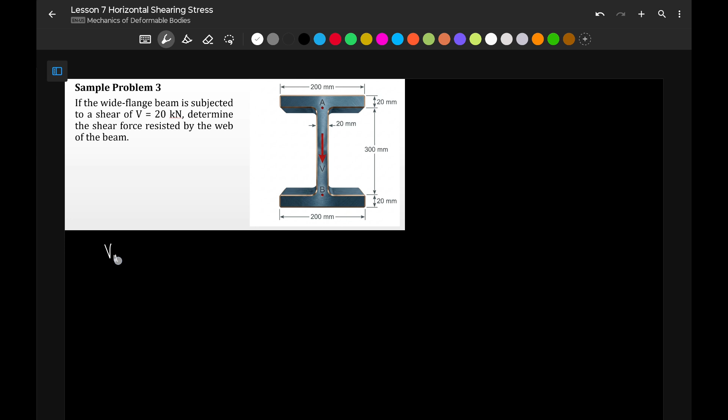Actually, medyo komplikado to no? Symmetrical yung figure natin, yung neutral axis natin ay nasa gitna kasi symmetrical siya. So dito yung ating neutral axis, this is our NA. Ngayon, yung crack mangyayari dito, so ang mangyayari dyan is kukunin natin yung maximum, no?

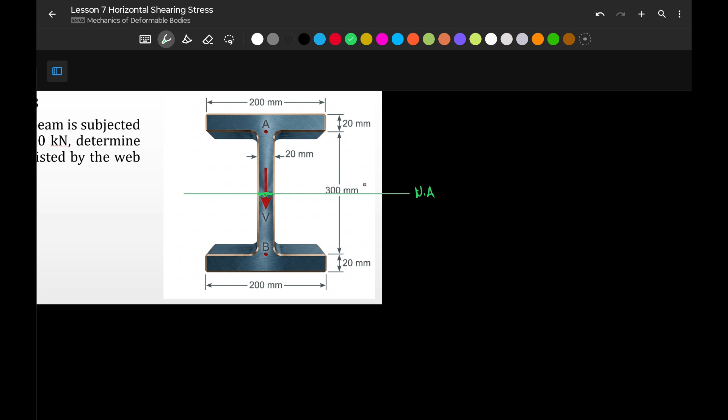Pero ang question sa atin kasi ng problem is resisted by the web. Ang tinatanong dito is yung amount of force na kine-carry ng section na to, this section. Hindi yung buong width or hindi maximum.

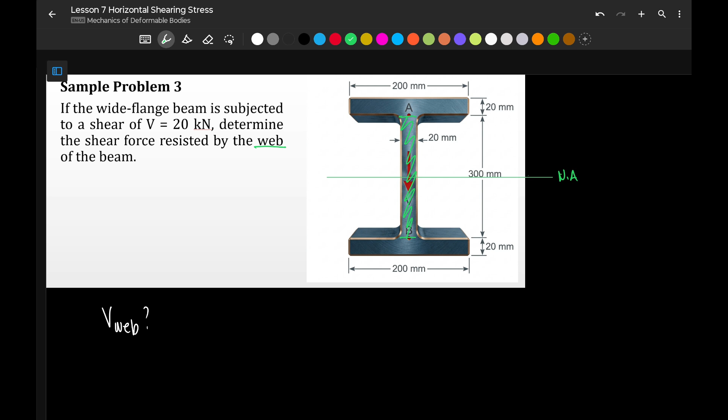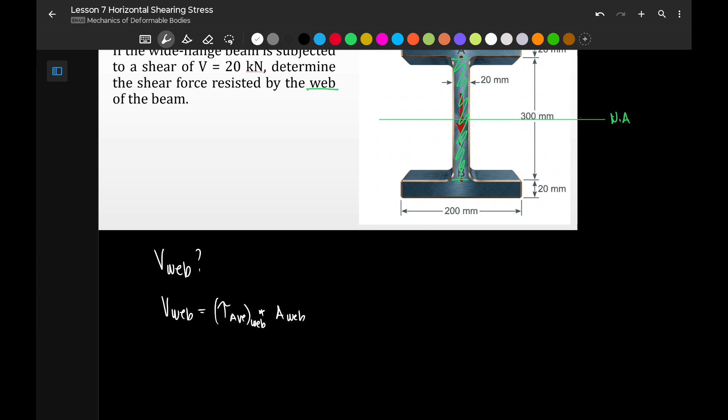Para makuha natin yan, yung shear force resisted by the web, that is equivalent to the average shear stress ng web multiplied by the area ng web. Again, this is the average shear stress ng web multiplied by the area ng web. Ang goal natin, hanapin yung average shear stress ng web.

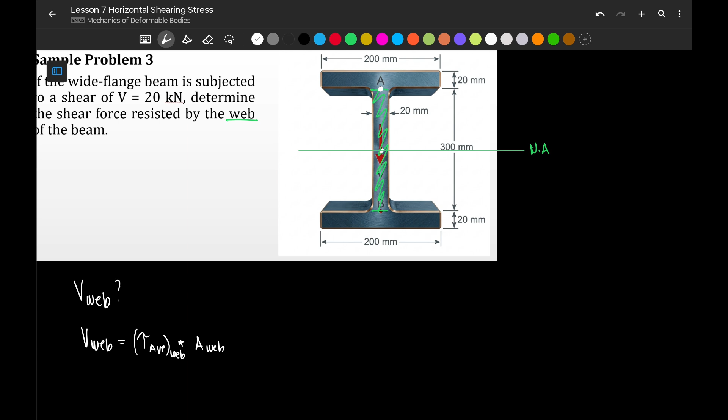Dapat makuha natin yung shear stress dito sa point na to at yung shear stress na point na to. Diba ang minimum o yung pinakamababang shear stress na nakukuha ng ating web ay nandito sa pinakadulo, kasi habang lumalayo ka sa neutral axis, lumiliit yung shear stress. So yung pinakamababa ay nandito at yung maximum ay yung nandito. Kunin muna natin yung shear stress dito sa pinakamababang point.

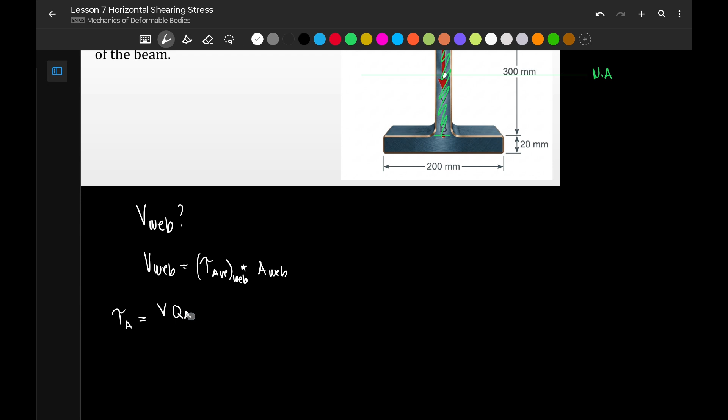Kunin natin yung shear stress at point A, which is equivalent to VQ over IB, at A ay B. Since andito yung neutral axis, kunin muna rin natin yung ating moment of inertia, I is summation ng I plus A D squared.

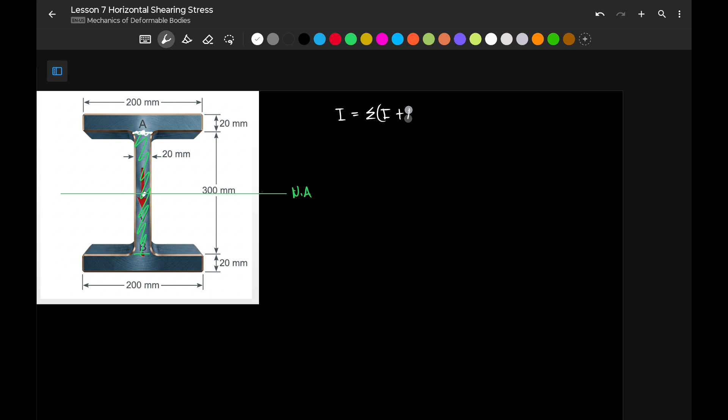Yung ating web naman naka-align doon sa ating neutral axis, so wala tayong problema dyan. Ang kailangan nating hanapan ng distance ay itong dalawang flanges. Ang distance nitong flange na to, ito yung ating D.

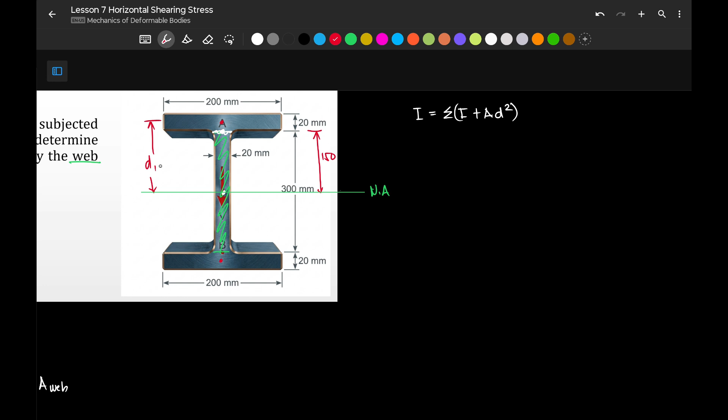D, let's call it D1, pareho lang yan nung D dito. And that is, kung ito hanggang dito ay 150, kalahati ng 300, tapos kalahati pa ng 20, then D1 is equivalent to 160. Okay, so let's solve.

I now is, unahin natin, let's say this is our section 1. Ito magiging section 3. At ito ay section 2 naman yung ating web.

For section 1, our moment of inertia is the base is 200, the height is 20 cubed over 12, plus the area is 200 times 20 and yung D1 natin ay 160 squared. Since symmetrical lang naman itong ating top flange tsaka bottom flange, i-multiply na lang natin yan by 2, plus. Then meron naman tayong web, yung area 2 natin.

Ang base naman niya ay 20 mm, ayun, yun yung lapad ng rectangle dito, 20 mm. Ang height niya ay 300 mm cube over 12. Wala siyang AD squared, may area siya pero wala siyang distance kasi naka-align sa neutral axis yung kanyang center of gravity rather, so naka-align, 0 yung D. Kaya ito na lang yung ilalagay natin. So our I is...

200 times 20 cube. Actually, may ibang technique dito kung saan negative area naman yung gagamitin natin, ima-minus natin yung area na hollow. Pero ganun lang din naman, di naman tayo magsosolve ng matagal.

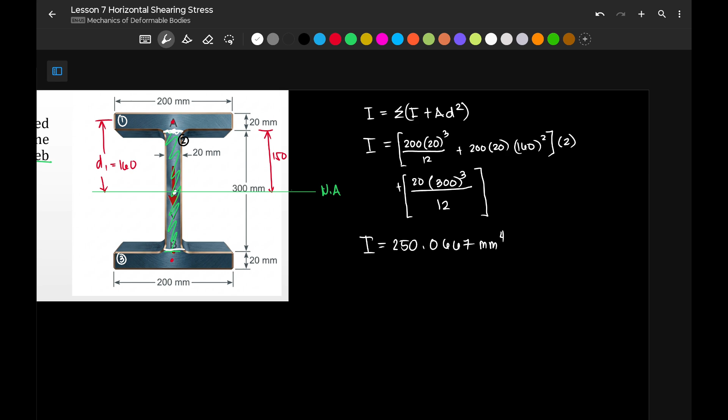Kunin naman natin yung Q sa point A. Ano yung magiging Q natin kay A? That is the area ng A, 200, yung area nito. Assumingly na ito yung hihiwalay sa atin kasi ang crack ay nasa point A, nandito, so ito hihiwalay ito.

Pag humiwalay yan, the area is 200 times 20 multiplied by y. Yung y natin is yung atin ding 160. So our QA is 200 times 20 times 160, we have 640 times 10 raised to 3 millimeter cube. Di ko na ilagay yung ano nito, this should be times 10 raised to 6. Meron na tayong Q at A.

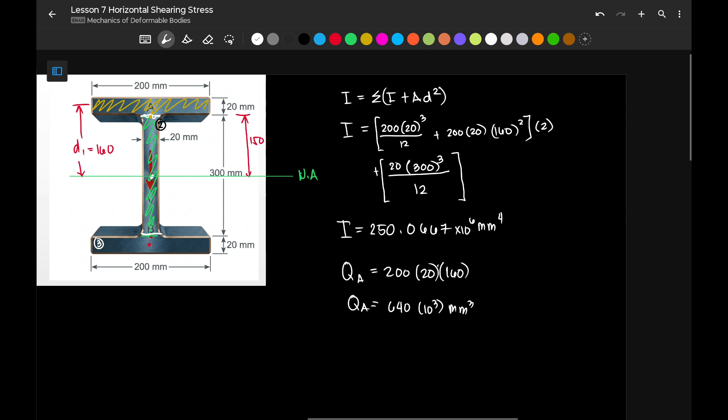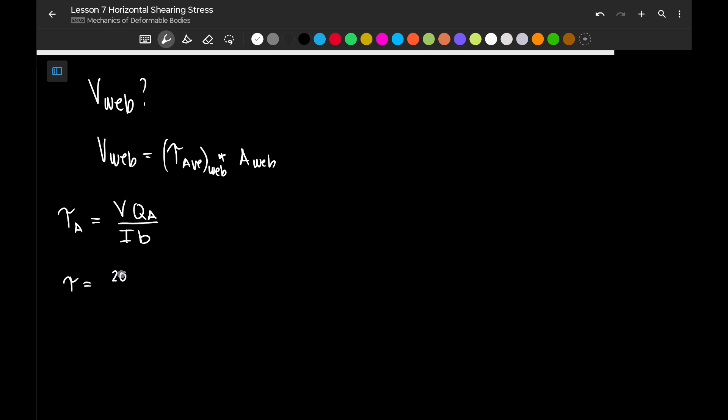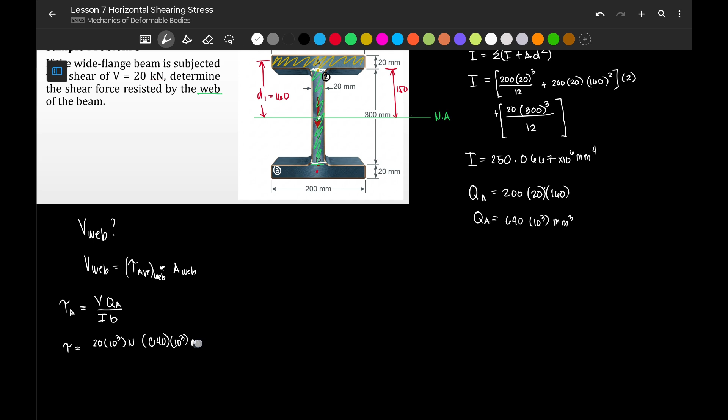Pwede na natin ma-solve yung minimum shear stress. That is V, ang shear daw natin ay 20 kN. So that is 20 times 10 raised to 3 newtons multiplied by Q, our Q ay 640 times 10 raised to 3 millimeter cube, divided by our I.

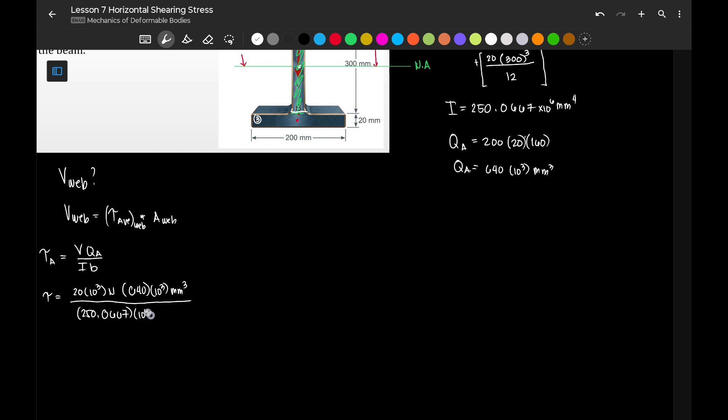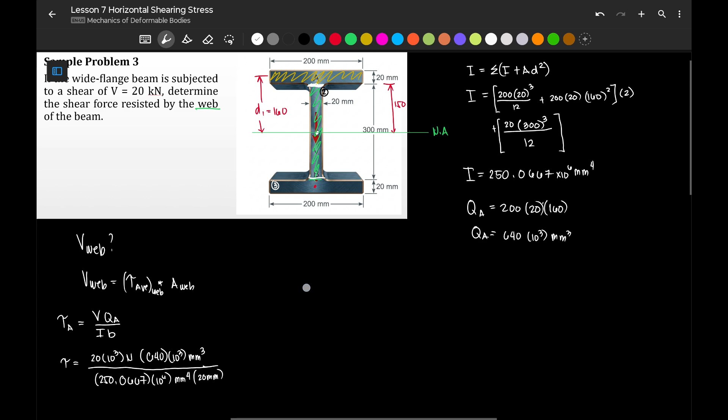Our I is 250.0667 times 10 raised to 6 millimeter to the fourth, times ang lapad ng shear natin dito, kung ito yung crack, that is 20 millimeter. Actually yung 10 cube pwede na nating alisin yan, meron tayong dalawang 10 cube that is 10 to 6, so units cancel na to. So Newton per millimeter squared, and our shear stress is 20 times 640 divided by 250.0667 rather, times 20. We have 20 cancelable pala eh.

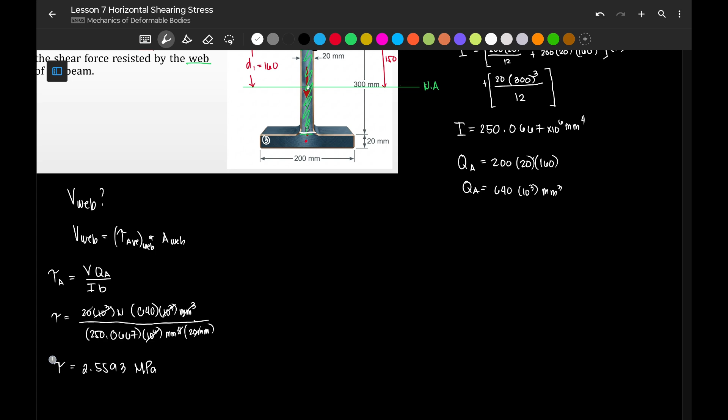2.5593 megapascal, okay? Yan ay sa point A pa lang. Kunin naman natin yung sa maximum. Pag maximum na yung pinag-uusapan, ang crack natin ay nandito na. So ang area na mariremove sa atin ay ito.

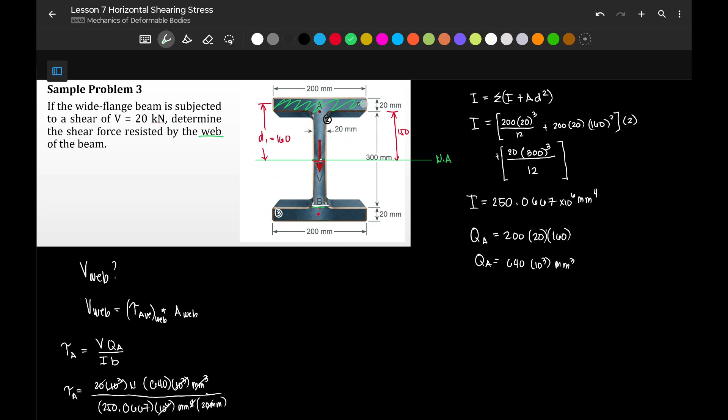Okay, so ang problem nito, paano natin kukunin yung Q sa neutral axis? Madali lang yan, hatiin pa rin natin dito, tapos kunin natin yung Q ng bawat isa. Yung Q na itong nasa taas, alam na natin yan, 640 times 10 to 3 millimeter cube.

Ito namang Q ng nasa baba, 150 times 20. Yan yung area niya, yung y bar niya kalahati, so that is 75 mm. So yung Q natin ngayon sa neutral axis will be 640 times 10 raised to 3 plus 150 times 20 times 75, and that is 865 times 10 to 3 millimeter cube.

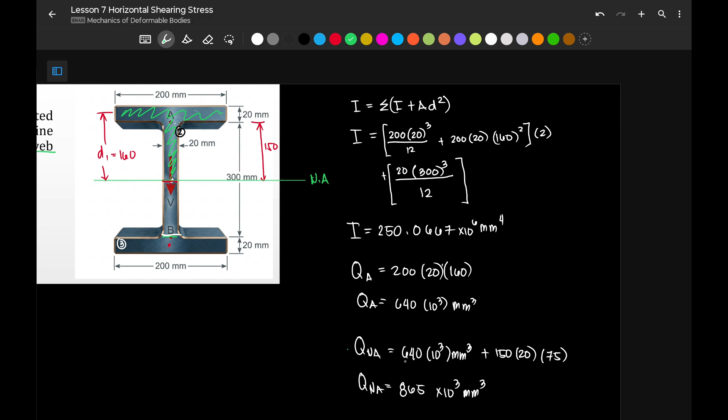So yung pagkuha ng Q, pwede rin nating hiwa-hiwalayin yan, ano? Para lang din Varignon's theorem talaga yan, okay? Actually, Varignon's theorem nga talaga yan, moment of area, static moment of area, no? So Varignon's theorem lang din yan. Nawala lang yung y bar, nawala lang yung area y bar dito. So yan din yun, Varignon's theorem lang din yan, okay?

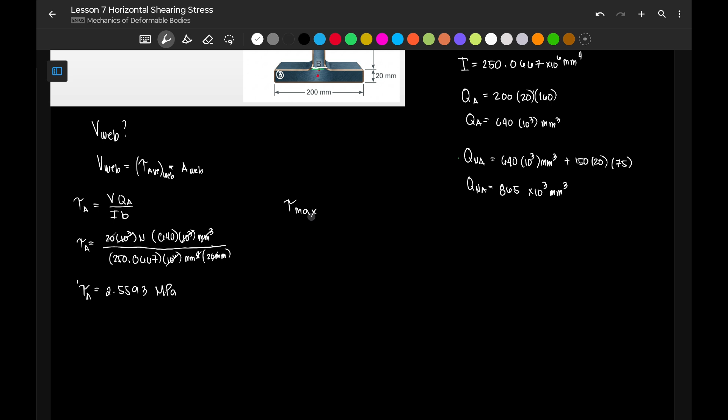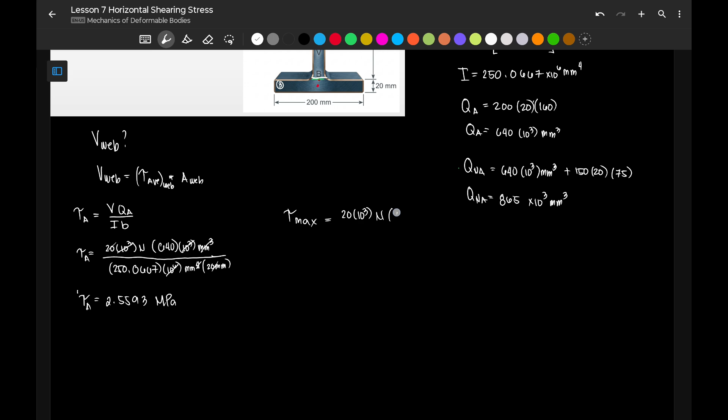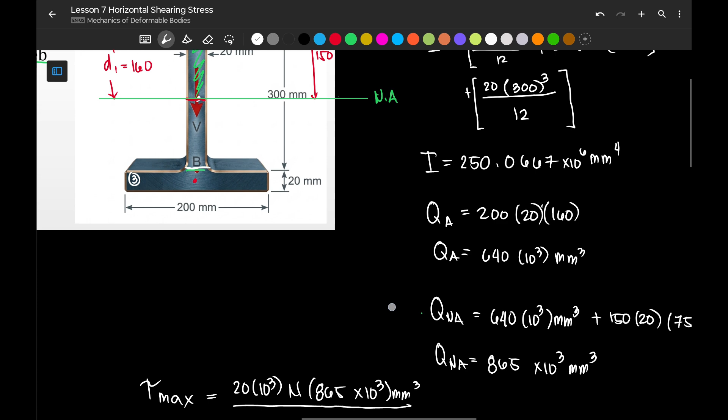So kunin na natin yung tau max. We have here the maximum shear stress, or the maximum shear force muna tayo, 20 times 10 to 3 Newton. Then our Q, 865 times 10 raised to 3, ang liit, millimeter cube, divided by our I, 250.0667 times 10 to 6 millimeter to the fourth. Then ang lapad ng ating width, ang lapad ng ating crack, ay 20 millimeter.

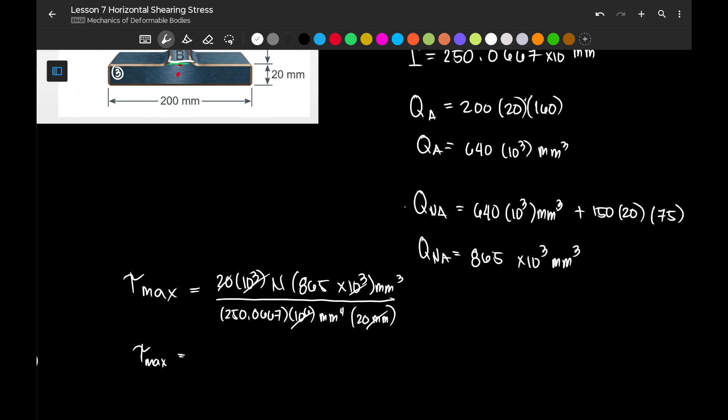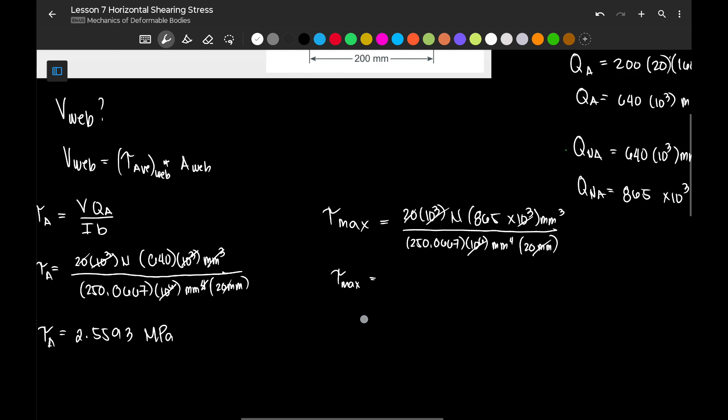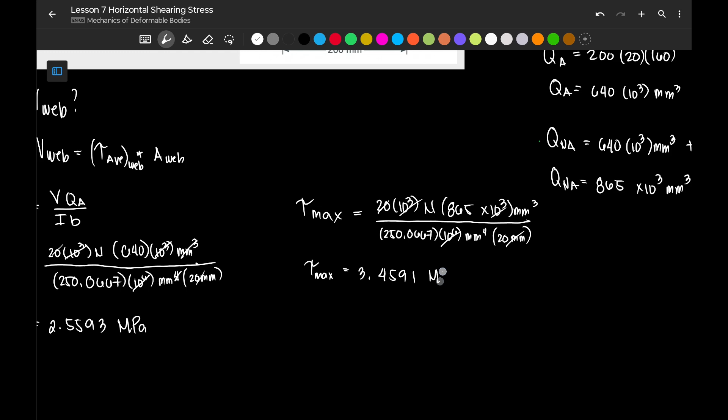Cancel na to, tanggalin na yan. So our tau max is just 865 times 10 to 3 divided by 250.0667. We have, parang kay taas, 865, naka times 10 to 3 ko pa kasi. Okay, this is 3.4591 megapascal. So i-drawing natin yung ating magiging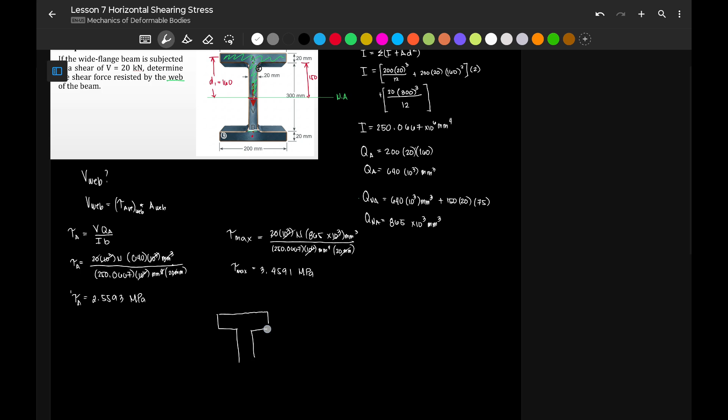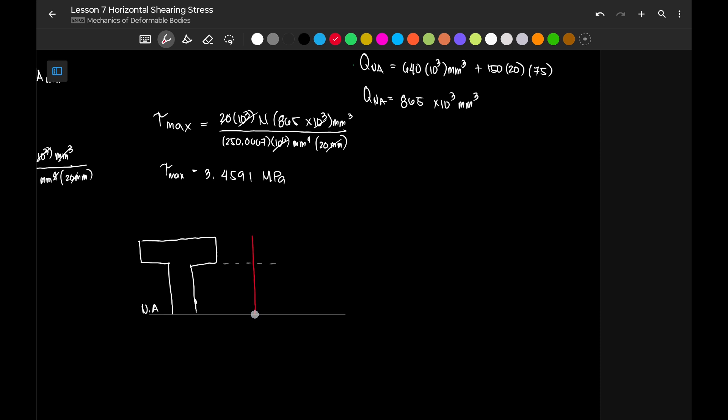Stress distribution dito, kung okay lang kahit kalahati na lang kasi hindi maganda itsura nito. So ito yung ating neutral axis, kalahati na lang yung drawing ni Sarah, okay? So ito yung ating reference line. So at this point, sa point A, ang shear stress daw natin ay

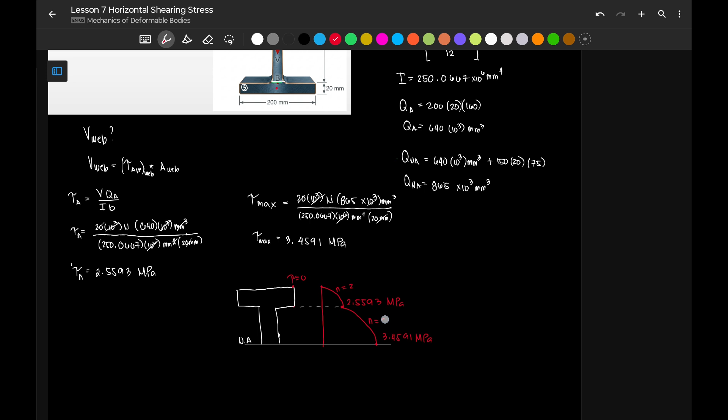2.5593, so assume na lang natin na nandito, 2.5593. So from 0, always 0 yung shear stress dito ha. So magiging second degree parabola yan. Then dito sa gitna, this is 3.4591 megapascal. So ito ngayon, parabolic din pag ganito naman, n is equal to 2. So yan yung stress distribution natin dito.

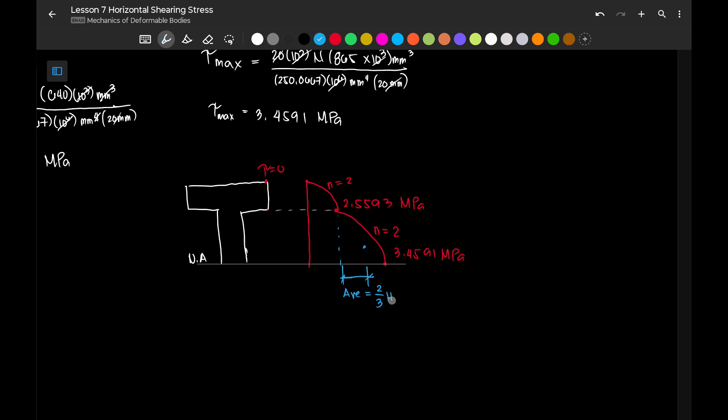Ngayon ang pinag-uusapan natin ay hindi naman yung maximum, hindi yung minimum, kundi yung average. Pero ang average nito ay hindi divided by 2 lang kasi parabolic ito. So the average shear stress natin, yung shear stress na to, okay? Yung average ng ating parabolic segment, that is 2/3 ng magiging height. So yung height na tinutukoy ay ito, 2/3 nito. Okay? So ano yung height ng parabola natin?

The height of the parabola is 3.4591 tapos hanggang dito, yan yung haba. So minusan natin ng 2.5593. So ang h ng parabola natin is 3.4591 minus 2.5593, we have 0.8998 megapascal. So the average ng parabola, hindi pa yung average shear stress natin ha, that is 2/3 ng 0.8998 which is

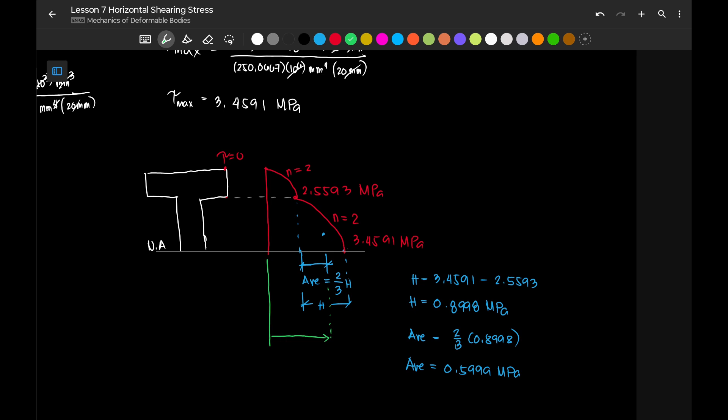0.5999 megapascal. And para makuha natin yung pinaka-average shear stress, magsisimula tayo sa 0, i-measure natin hanggang dito sa gitna ng ating parabola. So ito yung shear stress average natin. So yung shear stress average natin ay nabura. Yung shear stress average natin is yung distance nito, di ba yan ay 2.5593. So that is 2.5593 plus yung distance na to hanggang dito, that is 0.5999 megapascal, or the average shear stress doon sa web is

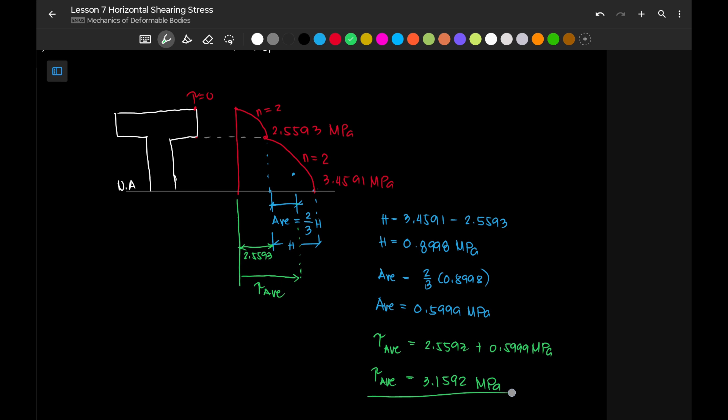2.5593 plus 0.5999. We have 3.1592, okay, megapascal. And this is the average shear stress. Yung isang ginagawa ko naman minsan, ang ginagawa ko lang is yung average shear stress, yan ay yung tau max minus 1/3 ng height. Pero ganun din kasi yan.

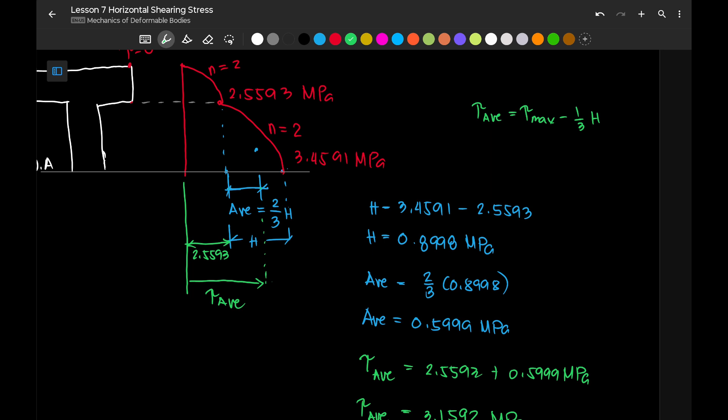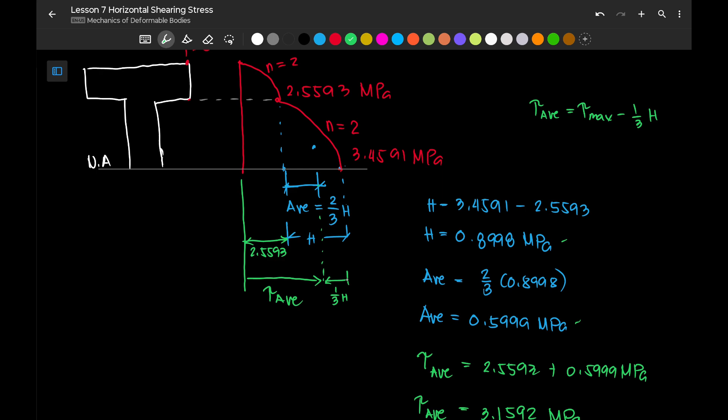Ganun din naman yung makukuha. Kailangan mo pa rin kunin yung height, kunin yung 1/3 nun. Same lang din, binawas ko lang yung side na to naman. This is yung 1/3 naman ng h. Okay? Pero pareho lang. Now, since meron na tayong average shear stress, pwede na nating makuha yung nararanasang force ng

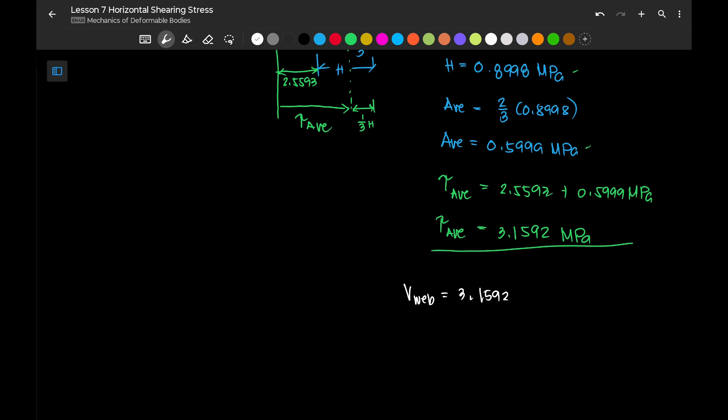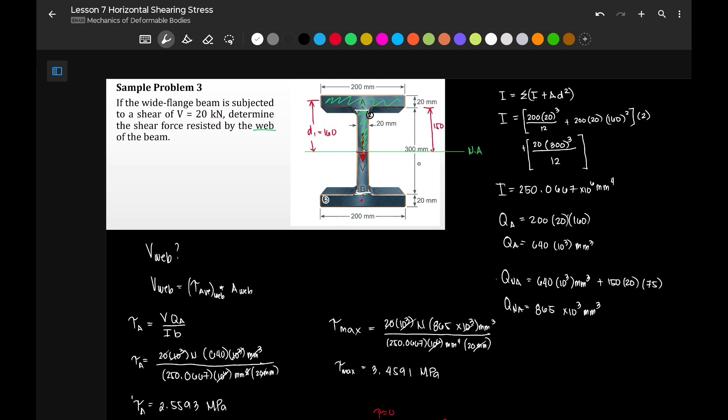Web. So yung V sa web natin, that is equal to 3.1592 Newton per millimeter squared multiplied by the area ng web. Ang total area ng web natin ay 300 times 20 yung thickness. So that is 300 times 20 and this is millimeter squared. So yung average force na kinikerry ng web is 3.1592 times 300 times 20.